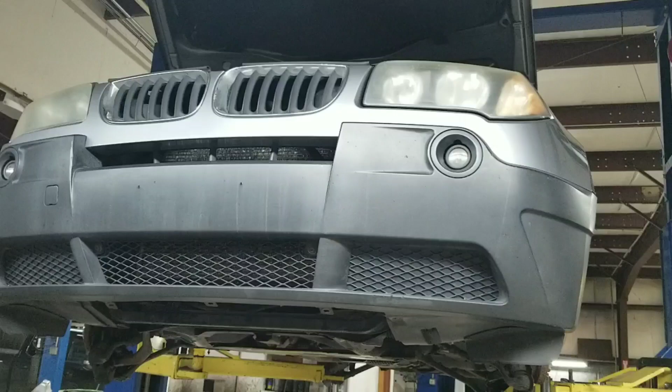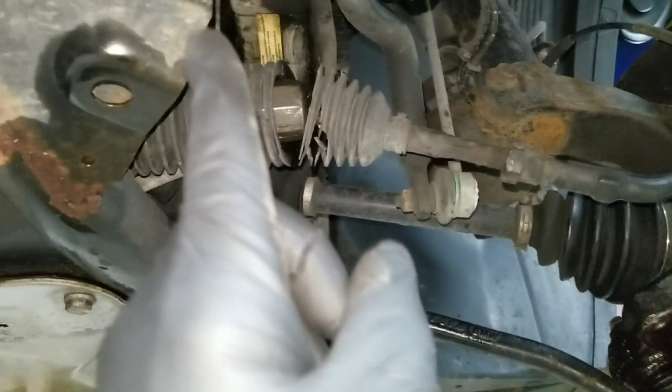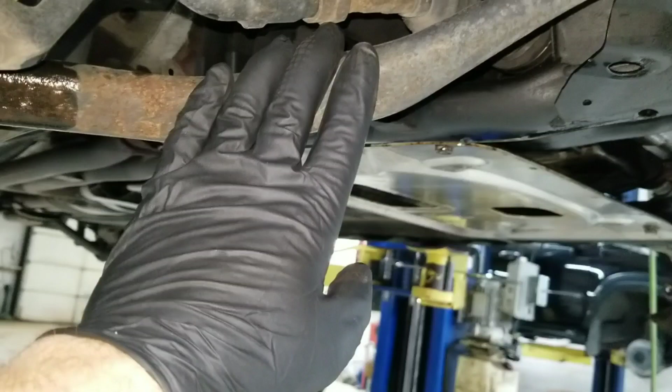This is a 2005 BMW X3. This happens to be the 3-liter, and I'm replacing the arm that should go here, which would be this one, referred to as several different things depending on model and year and everything, but either radius arm, tension strut, front lower forward control arm. But real common, the rubber bushings here go bad.

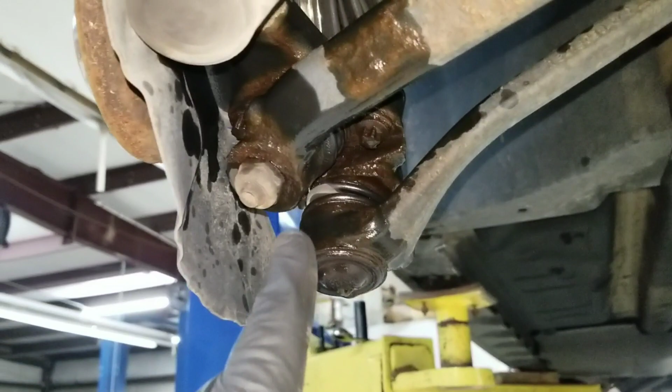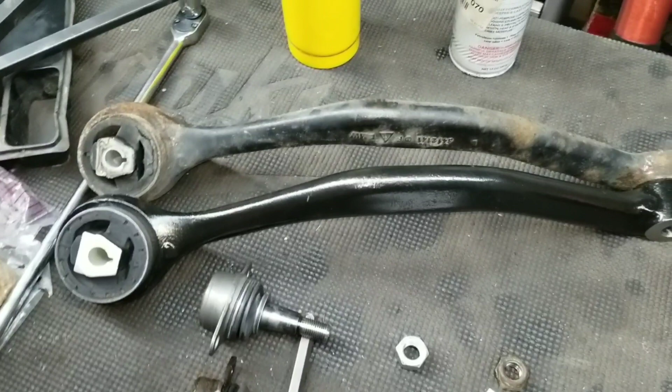These arms actually look original. There's nothing wrong with the ball joints, but what I discovered on this particular model is the replacements. There are a couple different part numbers, and the way that it's listed is really convoluted, and I will show a few documents in a proceeding clip, but the radius arm, the old style, that one, and the new style,

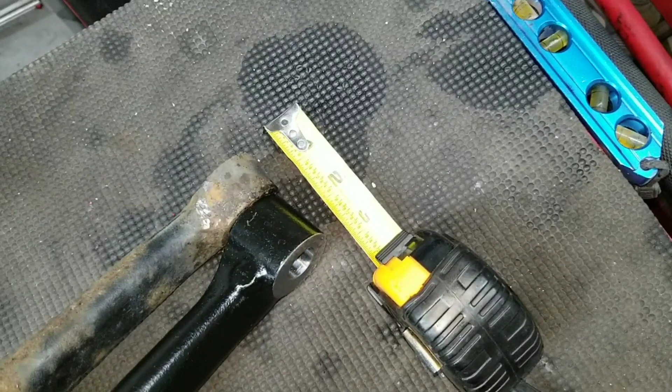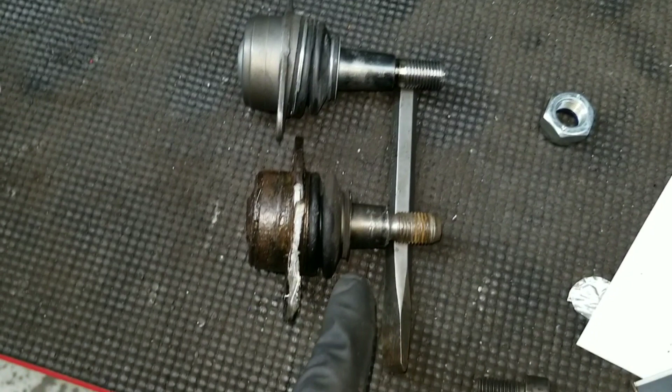they're the same length. From center of the hole to center of the hole is 17.5 inches. I think everything is actually the same other than the end where it attaches to the stud on the ball joint is significantly thicker on the newer one, and you can't get the old part anymore, or at least it's real difficult to find. So you have to replace the ball joint because the taper on the original stud is not long enough to engage with the new thicker end on this arm.

And you can see the actual length of the threads is identical, but if I line up the two ball joints here, the flange to flange, you can see the difference there. And then if I bring in the tape measure, there's about a 1/2 inch difference in the length of the taper, just so that it will properly engage. That's probably upside down, has to be because I'm filming, so that it'll properly engage with the arm and actually seat in there and be tight and not waller out and kill you.

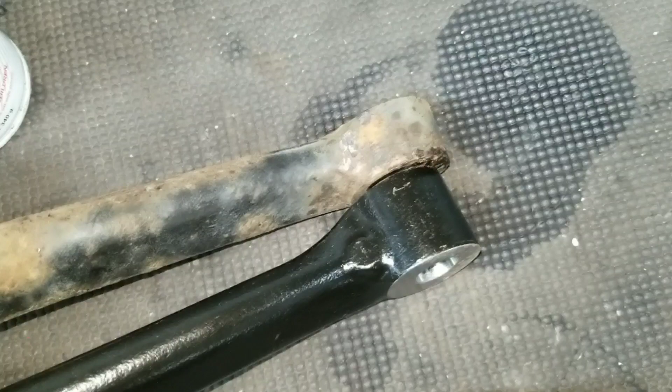I will make a note of all the dimensions so that when you go to order parts for your car, you'll be able to just measure the part to find out what you have, to see if you need to replace ball joints or not. Because I would not have replaced these ball joints. Actually, I was going to try and salvage the old ones. These were stuck in there. Penetrating oil, torch. Couldn't use the big torch because I would have melted the rubber on everything else.

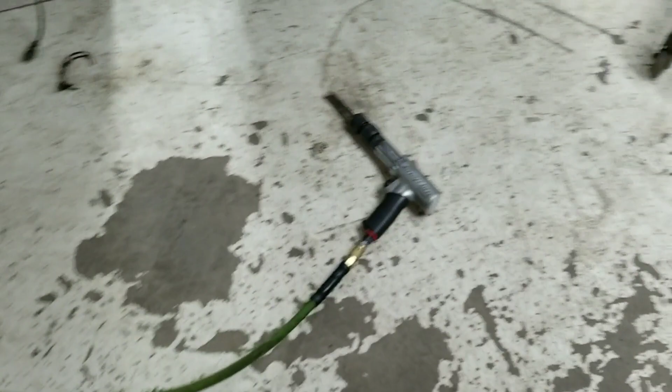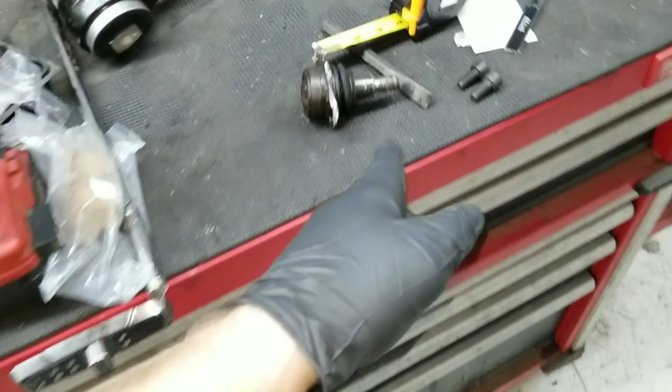Air hammer from every different direction possible, and eventually just hooked the end of a 10-pound slide hammer over the ball joint stud and just kind of hit it with everything, and finally pulled it out with that. I was worried about actually pulling the stud out of the ball joint before everything came out, but that one did come out, and got one more to do.

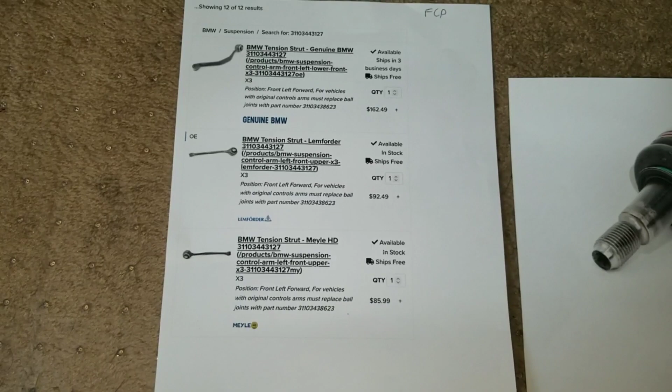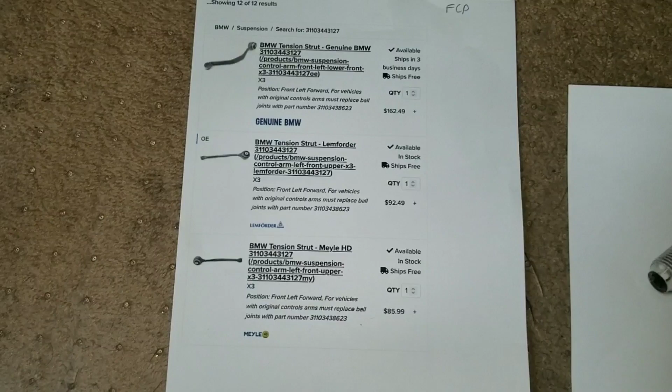Alright, now excuse me here because, oh, and the fan's blowing my paper away. Excuse me here because it's been a long time since I made the first part of this video. I actually forgot about it until I just found my paperwork here. This is a printout from FCP Euro, and you can feel free to pause and read through that. And then here's another one from Bimmer World over here. Feel free to pause and read through that as well.

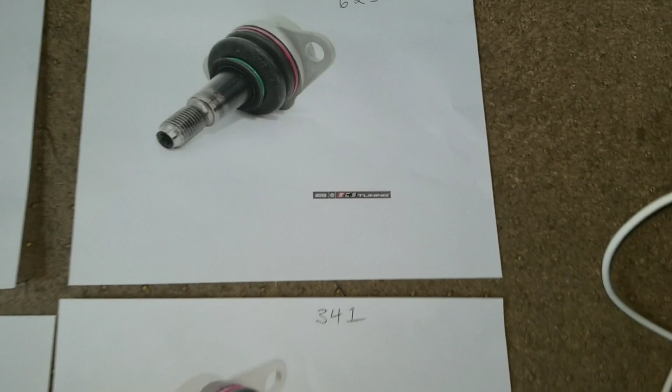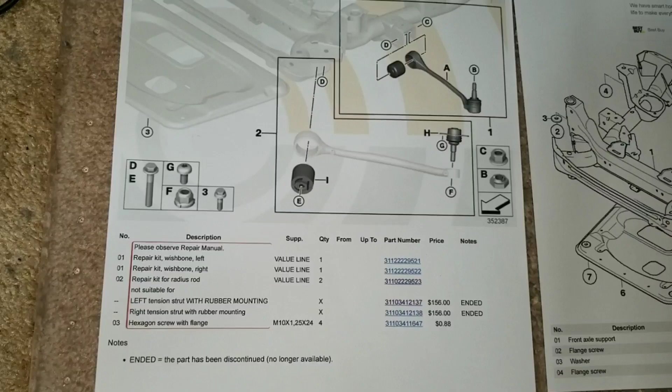And these are some pictures I found. You can kind of tell the difference. This is from ECS Tuning, but there's the 341 and the longer 623. You can kind of tell in those pictures. And then here is from Real OEM. I'll go ahead and zoom in on all of these. Another picture. But yeah, Real OEM, you can pull this all up and see this.

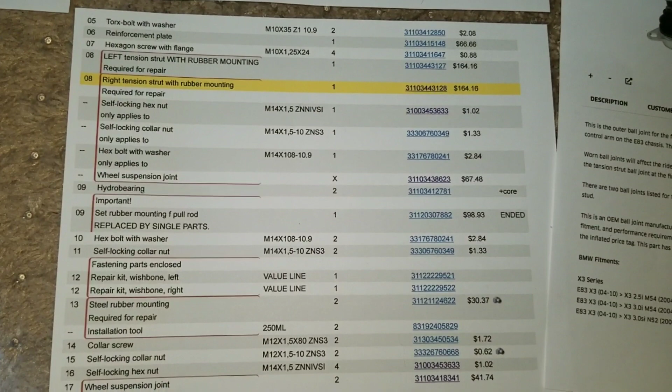Sorry about this format here. This is really kind of an afterthought. But I wanted to show that, and then I will roll in some pictures that I took of my parts once I had them removed.